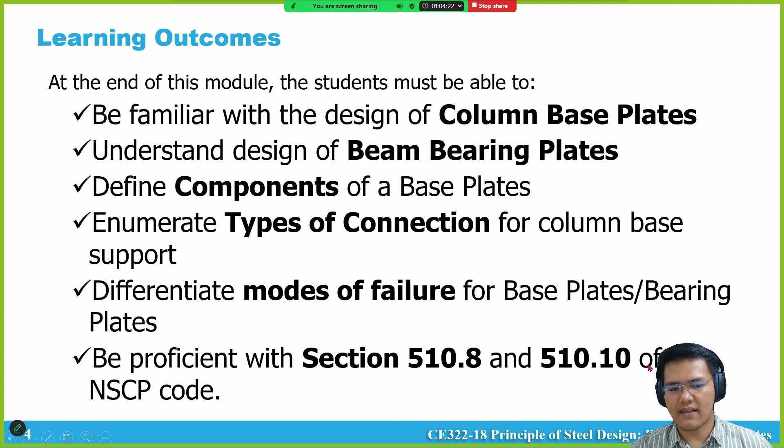So, okay, introduction muna tayo. This model of a certain structure was one of my previous projects, way back, I think 2022 or 2023, somewhere in Batangas, that uses base plate. So this is a portal frame structure.

Yung portal frame, to be specific, is usually applicable to single-story steel structures na ang requirement is merong large open floor plans. Walang column dun sa pinaka-center ng structure mo, as much as possible unobstructed yung floor spaces mo. Yun yung usual na requirement, and usually applicable yan sa mga industrial and commercial buildings, like mga warehouse. So ito yung project na to.

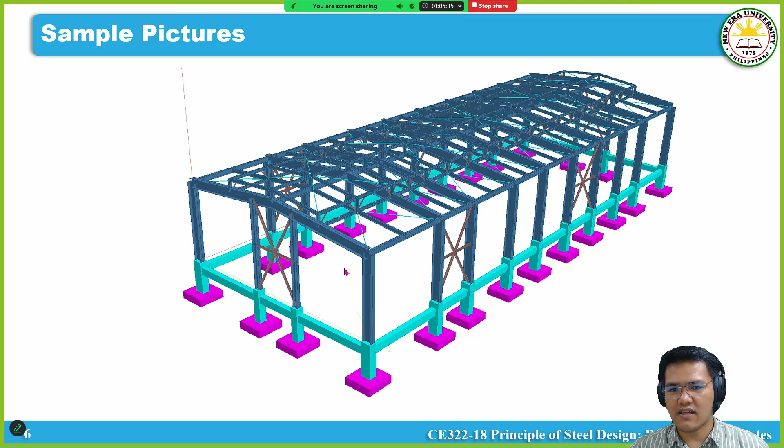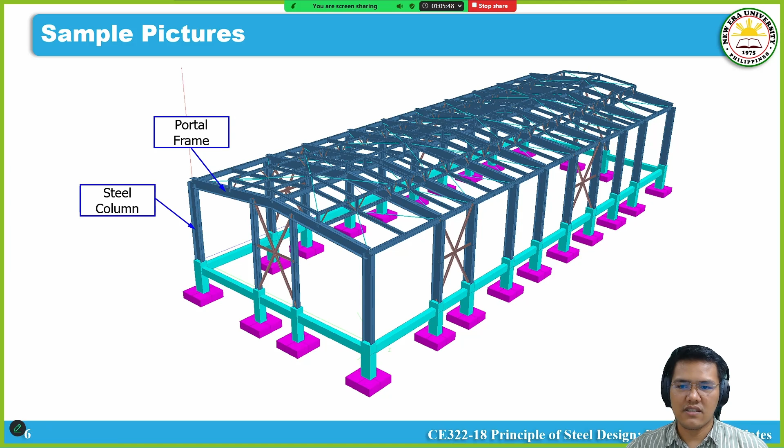So this is STAAD software yung ginamit ko. So we would enumerate yung mga structural members. Basically yan yung portal frame, yung system na ginamit natin dito. You have the steel column, and you have the concrete pedestal. Usually kasi hindi natin talaga binabaon yung ating steel column papaabutin natin hanggang footing, kasi una kakalawangin siya and hindi natin makita kung nakabaon yung steel member natin.

So ang nangyari ngayon, kung yung natural grade line or yung parang pinaka-finish ground level somewhere andito, makita mo yung pinaka-end or top nung concrete pedestal mo. Kaya nag-introduce tayo ng concrete pedestal para ma-investigate natin kung mayroong failure dun sa connection nung concrete and nung steel column. So ito yung concrete pedestal natin. Obviously concrete yan, you have the footing, and then we also have tie beam, yung ibang term dito is grade beam. At yung location na to, obviously yan yung location kung saan natin i-install yung ating base plate.

Minsan gumagamit din tayo ng cross bracing dun sa ating framing system to help against lateral displacement, specifically yung wind load, na most likely siya yung critical pag steel structure. So yun yung requirement natin as much as possible: expose yung ating base plate para nakikita natin for inspection purposes.

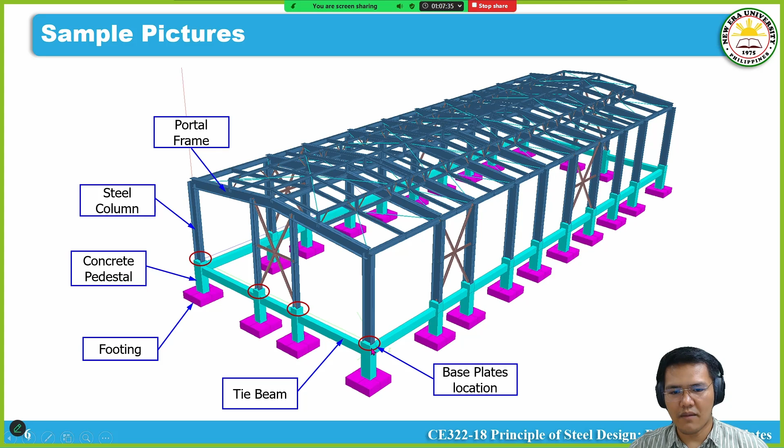Okay, now ito yung actual constructed project. By the way, ibang project to, pero same system lang din yung ginagamit at the same location ng project, or sabihin natin same different structure to. So you can see here na ito yung parang pinaka base plate natin, and we have the concrete pedestal. So how do you think this was constructed? Okay, yun yung discuss natin for today.

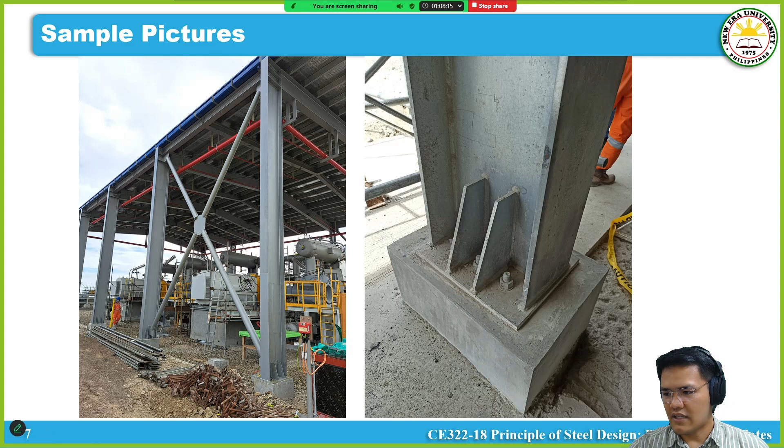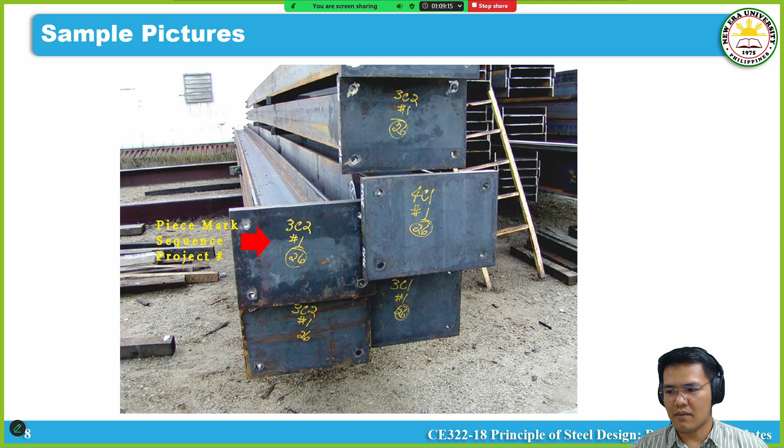Ang mangyayari kasi kung wala kang base plate, halimbawa steel column connected directly sa concrete pedestal, masyadong malaki yung mga loadings natin minsan sa steel column natin. Kung ganito yung section natin, wide flange, kumbaga masyadong matalim yung section natin, ang nangyayari is napapunch or nagka-crush yung concrete natin kung directly connected siya. So to avoid that scenario na mag-crush yung concrete natin, which is a mode of failure sa ating connection, we need to distribute evenly yung ating column loads, through the use of base plate. Yun yung gamit ng pinaka-base plate natin.

As I mentioned, usually shop welded na yung ating base plate sa bottom ng ating steel columns. Minsan, by the way, hindi lang siya connected sa concrete pedestal. May mga scenario na kung saan yung base plate natin is nakaconnect siya sa slab. Minsan nakaconnect sa beam, minsan nakaconnect sa pile caps, or minsan directly sa footing. So may mga ganong scenario.

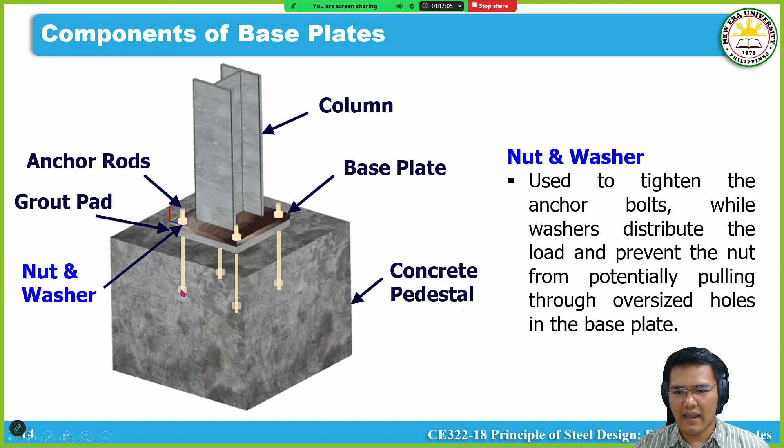Okay, now we're done with the components. So let's break down the individual parts - for example, let's discuss the anchor rod details.

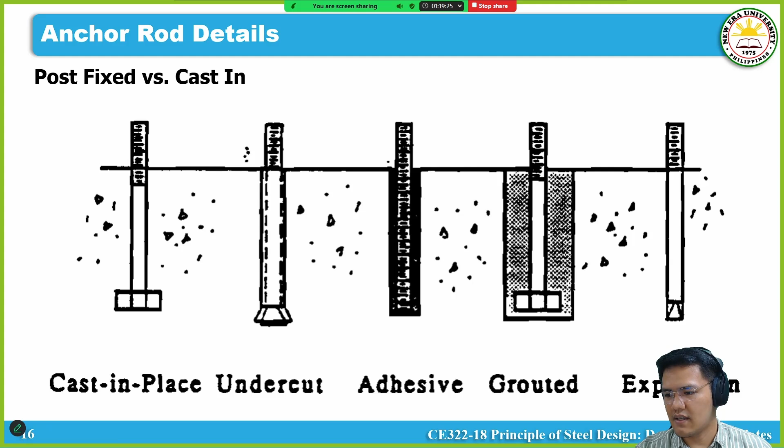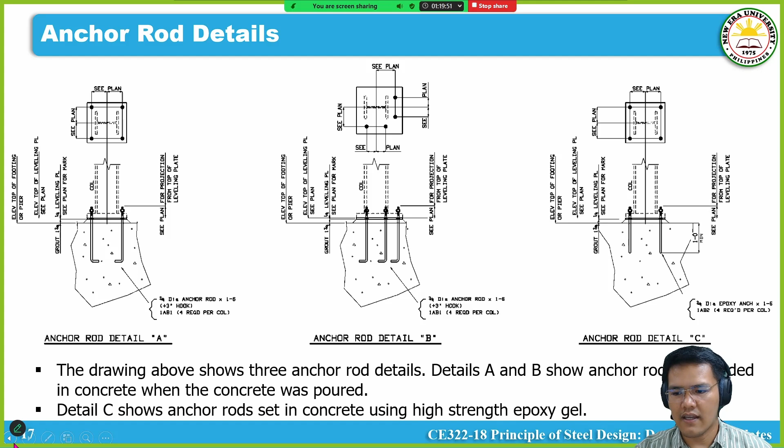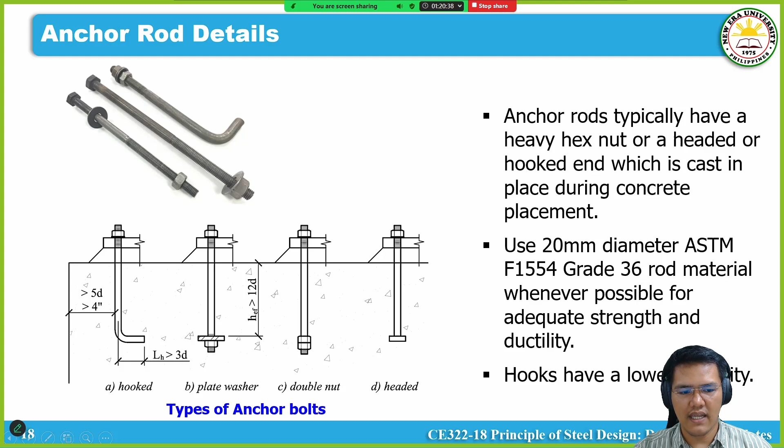During concrete placement, usually 20 millimeter diameter, grade 36 rod ang ginagamit. So again, yung hooks would have a lower capacity in comparison with this system.

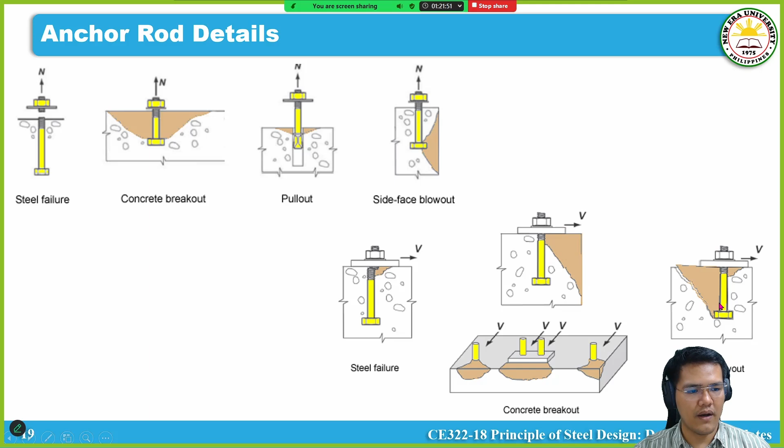And on this one, shear yung action mo. Meron kang steel failure, obviously shear failure to, kasi perpendicular yung load. We have a concrete breakout like so, ito yung mga example. And concrete pry out. So ibig sabihin ang dami talagang mode of failure for base plate design.

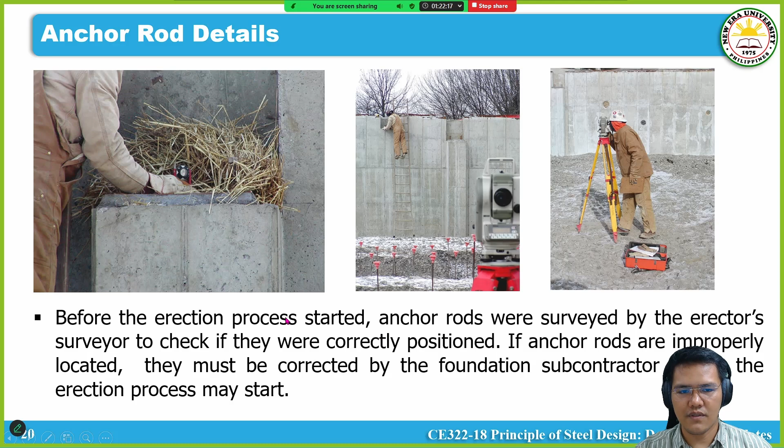Usually to make sure na accurate yung installation ng ating mga connections sa base plate, we usually have it surveyed to check na correct position tayo. Gumagamit tayo, depende sa contractor, ng total station.

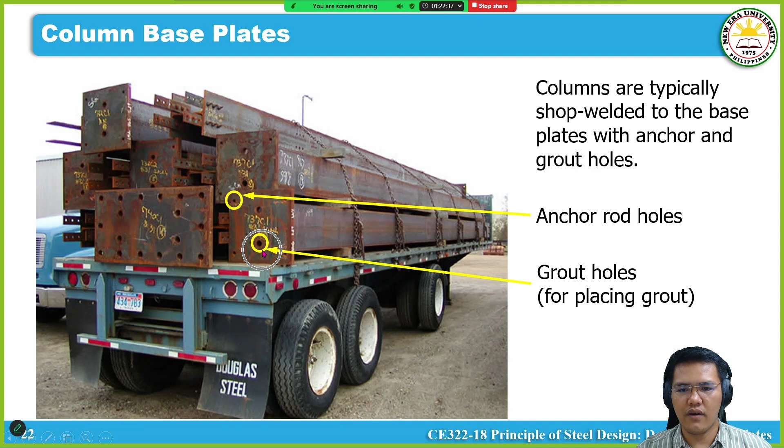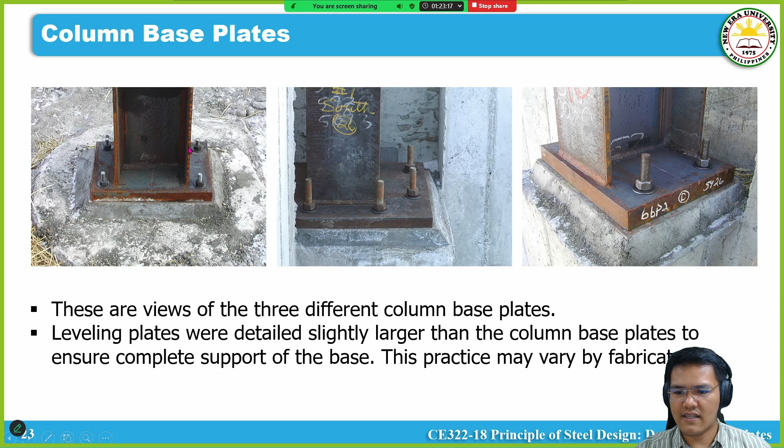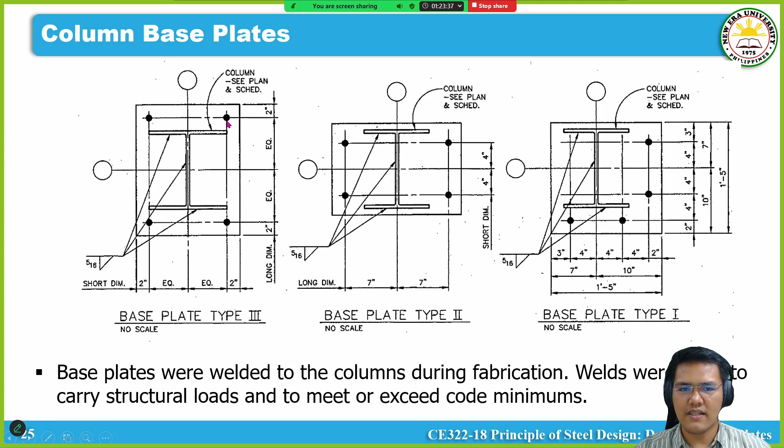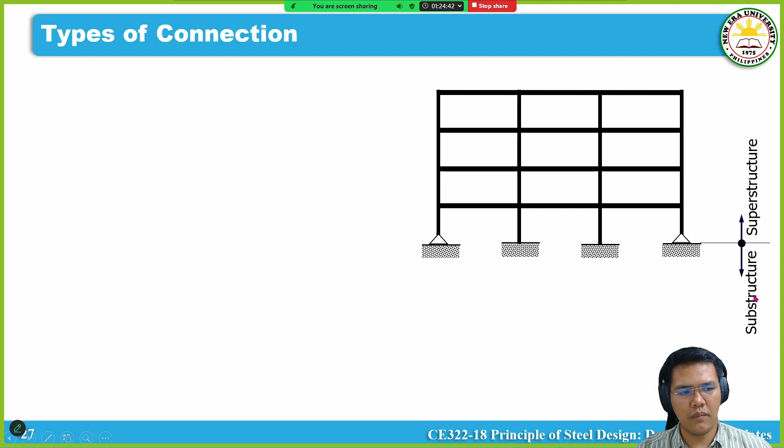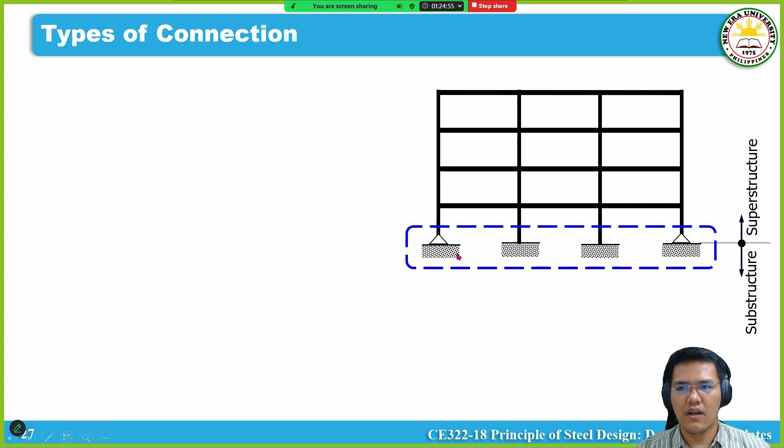Now, on this level, dun sa connection ng steel column and concrete pedestal, dun tayo nakafocus. Ang question kasi is, ano ka ba? Pin ka ba or fixed connection? Yan ang tanong. In terms of the column support fixity, dun sa base natin, pin ka ba or fixed?

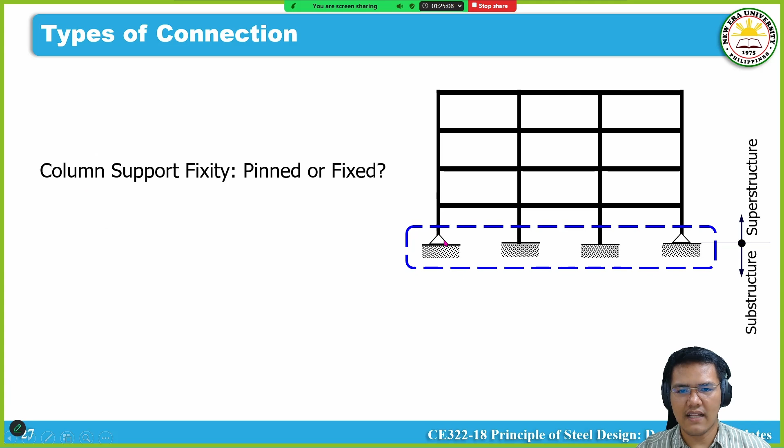So depende yan, para malaman kung ano yung gagamitin mo. Depende yan kung ano yung assumption ng designer. Ang sagot dito, number one is, ano ba yung assumption ng designer in terms of lateral stability? And ano yung fixity ng columns? And he or she kailangan niyang i-detail yan dun sa kanyang drawing appropriately.

Halimbawa, moment connection ba siya? Dapat yung detail nun sa drawing is for a moment connection. Otherwise, magkakaroon ka ng problem, dun sa idealized structure mo to the actual and constructed structure mo.

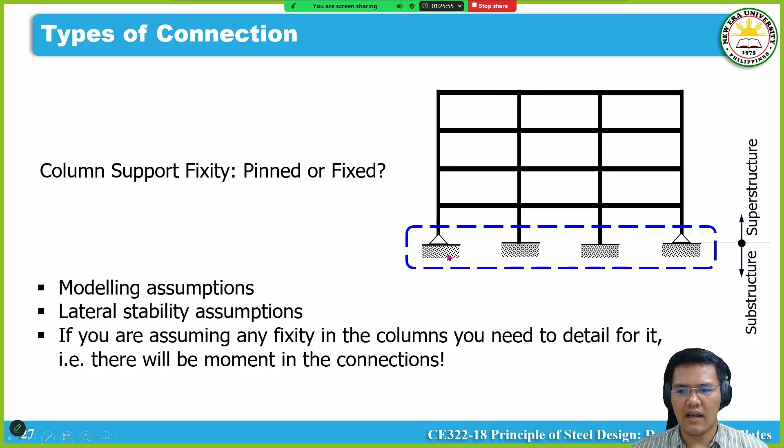Now again, in terms of the types of connection, dalawa yan. Sa base plate, yung pin connection na tinatawag, ito yung connection na kung saan it could transmit axial and shear forces only. So yung counterpart niya, ito. Ito yung elevation, meron kang axial compressive load, P, and shear, horizontal shear force, V. So pag tumingin ka sa top view niya, ito yung makita mo. Yan yung pin connection.

Makikita mo na yung sa connection na to, yung parang pinaka-angle, ayan. Yung angle mo, aside from the fact na possibly naka-weld ka, yung angle mo is connected sa web nung steel column. Ibig sabihin, kapag naglagay ka ng any force that would create any moment, it would allow rotation kasi nga pin connection ka. So ganito siya din detail.

Similarly, yung isang types is the fixed connection, which means it would transmit moments in addition to the axial and shear force. So ito na yung mga loadings natin ngayon. So you can see na iba yung detailing niya, yung connection niya dun sa base plate from the steel to the steel column is naka-connected yung flange mo.

Ng steel column. So yung effect niyan is it would hold down in place yung pinaka steel column mo to the base plate. Imimimic niya yung fixed connection. So in this one, there would be it would resist any rotational movement.

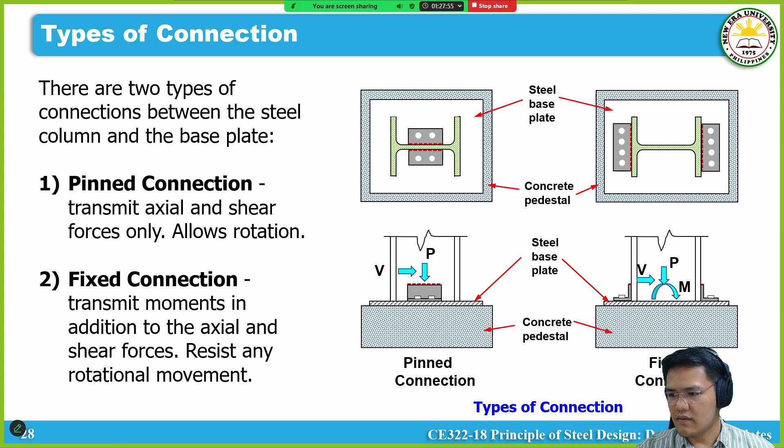Now, ang question is, kapag nasa practice na kayo or nagdi-design na kayo, ano yung appropriate types of connection na dapat mong gamitin? Fix ba or pin? Or pin ba or fix? So itong table na to would give you an idea kung ano ba dapat gamitin mo.

So for example, itong first row, we have the application. So for pin connection daw, usually ginagamit yan kapag yung deflection requirements mo are very stringent and the structure needs to be more flexible. Kasi nga, pinned mo eh, so flexible yung structure mo.

Similarly, kung fix ka, usually ginagamit daw to kapag yung column mo needs to be rigidly connected to the foundation. And therefore, it would resist any bending moments, and it would provide stability.

In terms of example, ng ating pin connection, a simple building or sabihin natin one-story building frame with columns connected to a foundation can have a pinned base at the bottom, allowing for some movement and flexibility.

Similarly, yung fixed naman, for an example nito, so in structures where the columns are subjected to large bending moments, ang halimbawa nito, yung tall building or high-rise, fixed connection at the base are often used to provide greater resistance to these large bending moments. Yun yung usual na in practice.

Similarly, yung epekto nito or implication nito, kapag pinned connection yung ginamit mo, it would result into larger steel section sizes for the superstructure, yung columns mo specifically. Bakit? Kasi nga yung moment mo binubuhat nung mga columns mo, hindi nung base plate mo.

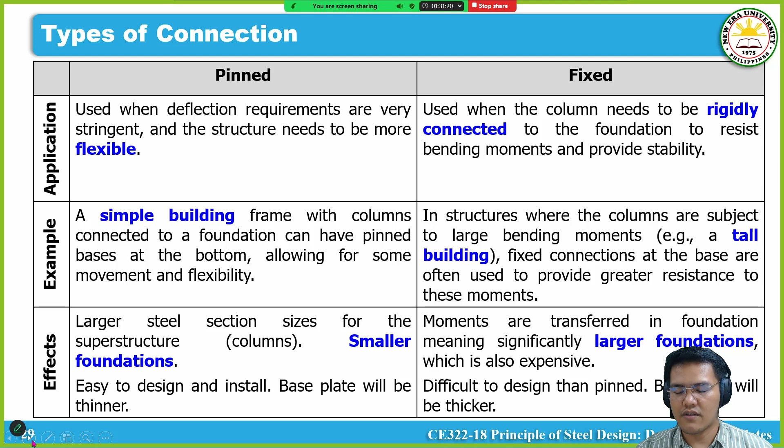Let me emphasize lang na on this discussion, we would focus only on pin connection. So hindi tayo magdi-discuss ng any fixed connection as it would be matrabaho, at sa board exam naman usually hindi lumalabas si fixed connection.

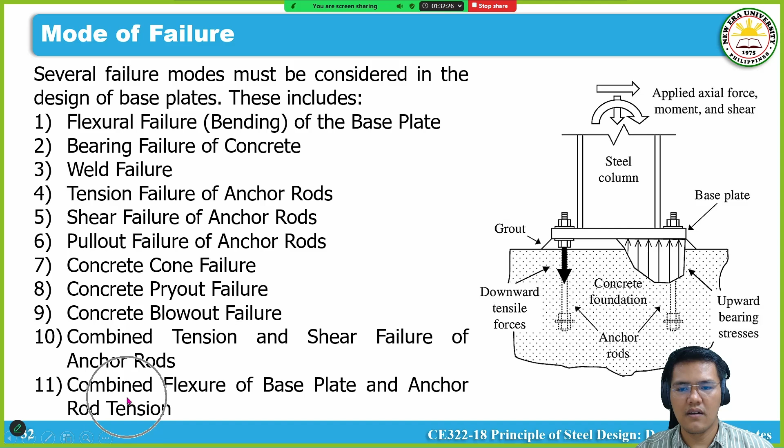For a given base plate, to simplify our discussion, we will limit that.

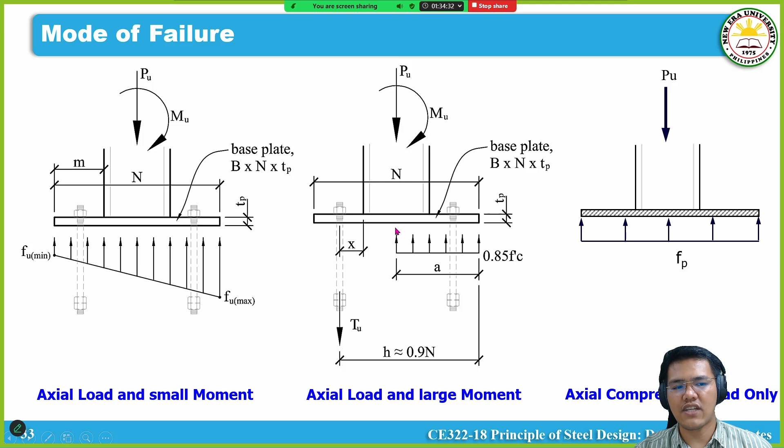So that's the scenario or stress distribution when it comes to different types of loading. In terms of analysis, it's case to case. Now let me emphasize again, in our discussion we would focus only on this scenario: axial compressive load only.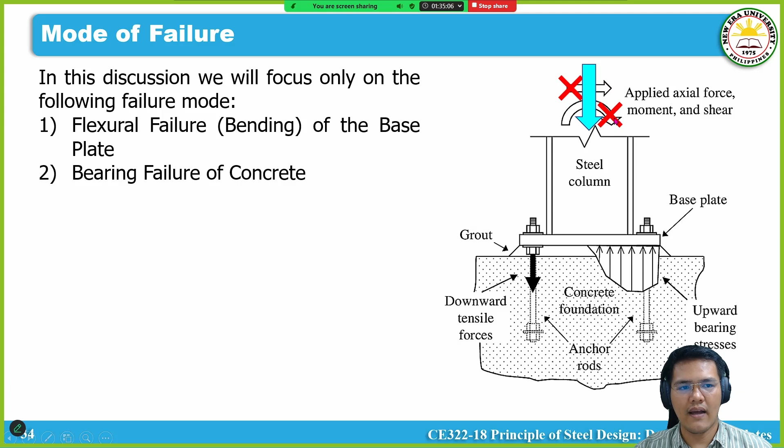In terms of mode of failure, let's simplify our discussion. We would focus only on these two modes of failure: the flexural failure or bending of the base plate, and the bearing failure of the concrete. Again, let me emphasize, axial compressive force only, no shear and no moment. Pin connection, axial compression load only.

Now let's proceed to bearing on concrete. These are the formulas we need to discuss first in terms of how they were derived. In terms of code provisions, NSCP 2015 discusses this in section 510.8. It says here, on bearing on concrete, this is what we call the nominal bearing strength. Emphasize on the word used, strength, meaning the units are in kilonewtons.

Bearing means you get crushing on the concrete, that's its effect. Your nominal bearing strength, in case 1, full area of concrete support - we'll discuss what that means later - your formula is F sub P, P sub P is equal to 0.85 F prime C, or FC prime, times A sub 1. By the way, all the formulas we'll use in the design of base plate come from here.

All the formulas come from the classic formula, stress equals load P divided by area. We just rearrange it. For example, this formula here is in terms of load, so you could say P is equal to stress times area.

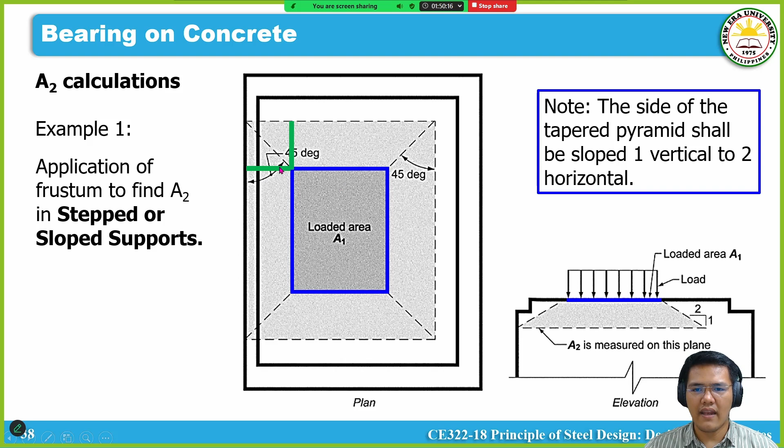Kung baga, sa case na to, yung side na to yung unang na-reach, tapos yung distribution. Kasi hanggang dun lang, halimbawa, sa side na to. Ito yung counterpart niya. Hanggang dun lang yung distribution. So yun na yung basis ng ating calculation. Yung pinaka-area talaga ng basis ng area 2.

Is ito, itong hidden maroon colored line na to. So ito yung sa plan, ito naman yung sa elevation. Just to take note lang, yung slope ng distribution natin as per code, that is 2:1. 2 yung ating horizontal, 1 yung ating vertical. Yan yung distribution ng ating for the area 2 calculations.

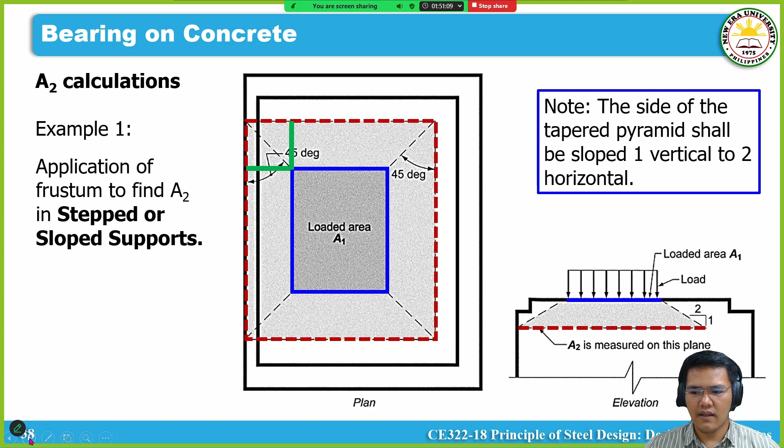Now, in terms of example number 2, ito naman for concrete footing. Yung steel column natin o yung base plate natin, naka-connected directly sa footing mo. Sa case na to, as per the code, kung gusto mong i-calculate yung area 2, halimbawa ito yung area ng ating base plate, area 1. Kung i-distribute mo daw yan, that is 2:1 na rule ng slope. Kukunin mo lang daw yan dun sa effective depth nung reinforcement mo. Yan ang rule ni code.

For concrete footing, yung definition kasi ng effective depth, hindi ako sigurado kung ano yung nomenclature na ginagamit nyo sa RCD. But on this one, D sub F, ang definition yan is from the concrete cover to the centroid of your reinforcement. Yan yung effective depth. Kunin mo lang daw doon sa distance na yon, yan yung location kung saan doon mo i-base yung pinaka area 2 calculations. Okay, I think enough of that.

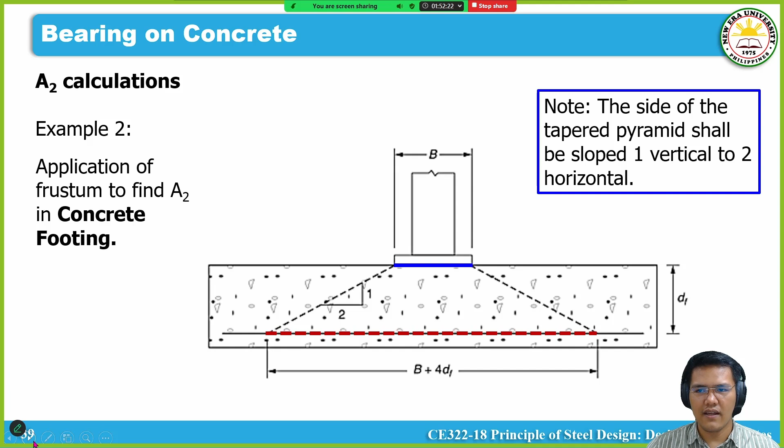Let's proceed pa dun sa bearing on concrete. Yung mga assumption natin, say for example, you have your steel column and meron kang base plate. Yung assumption natin is axial load, compression, load P. Common sense yan, kung i-consider mo yung free body diagram, kung meron kang downward na load P, it would be resisted by your concrete. And meron kang usually uniform upward pressure to resist yung downward load P mo.

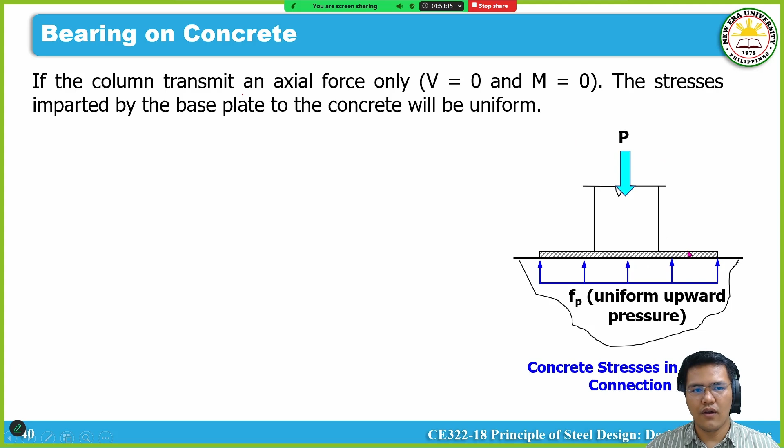So ibig sabihin yung pressure dito sa pinaka base plate natin, sabihin natin small letter F sub P, uniform upward pressure to resist yung load P natin. So let me repeat, yung assumption natin shear is 0, moment is 0, and therefore yung ating pressure here is uniform.

Now, the actual uniform concrete stress na tinatawag, pag sinabing actual, ito yung based sa actual loads na ina-apply mo, would be based dun sa equation na small letter F sub P. Ito yon, yung stress dun sa ating bottom of our base plate is equal to the load P applied divided by yung area ng base plate, area 1. Common sense yon, by the formula na stress is equal to load P divide area.

Gusto ko i-emphasize itong actual, ang symbol na ginamit niya is small letter F. So sabihin natin equation 3 to.

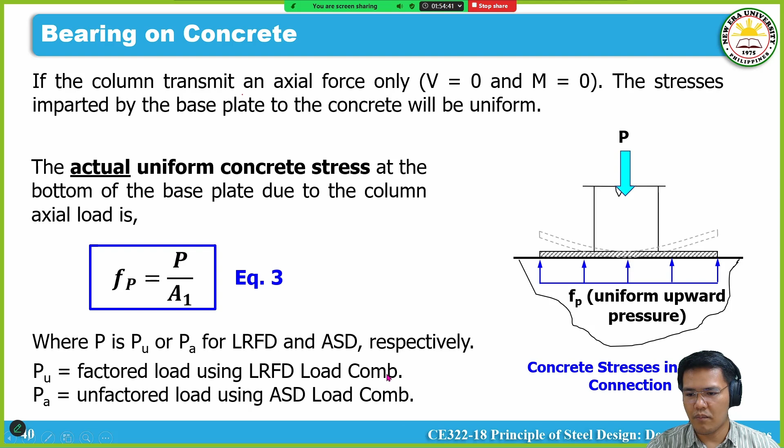So, to take note lang, to calculate yung load P, pwedeng maging load PU yan o load PA, depende kung LRFD or ASD na design philosophy. Yung P sub U, na-calculate yan based sa factored load using LRFD load combination. P sub A, unfactored load using ASD load combination.

Now, in terms of the limiting or permissible concrete bearing strength, kung dun sa previous slide, we're dealing with the actual concrete stress, which is basically dependent dun sa actual load P na in-apply mo dun sa base plate mo, meron tayong kailangang i-compare sa kanya, yung tinatawag nating limiting or permissible concrete bearing stress. Ito lang kasi yung limit, at yung magdi-dictate diyan, well, yung limit ng concrete, yung bearing stress dun sa concrete natin.

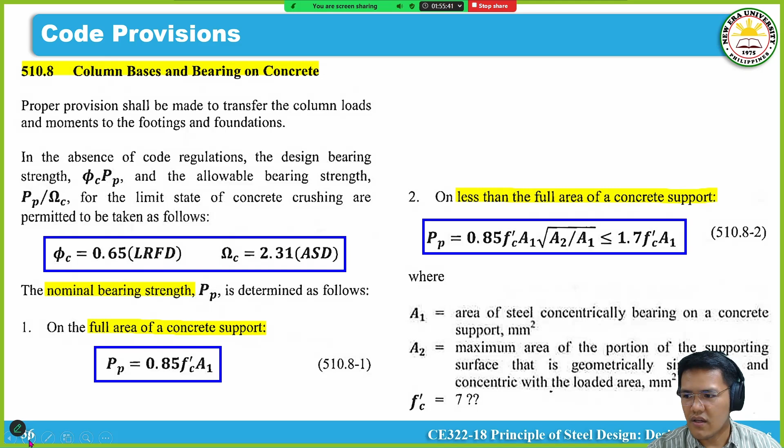Now, kung babalik kasi tayo, let me go back dun sa ating equation dun sa pinakasimula. Dito nung pinakita natin yung ating equation, if we would go back, yung ating formula is simply stress is equal to P over area. Halimbawa, gusto kong kunin yung load P.

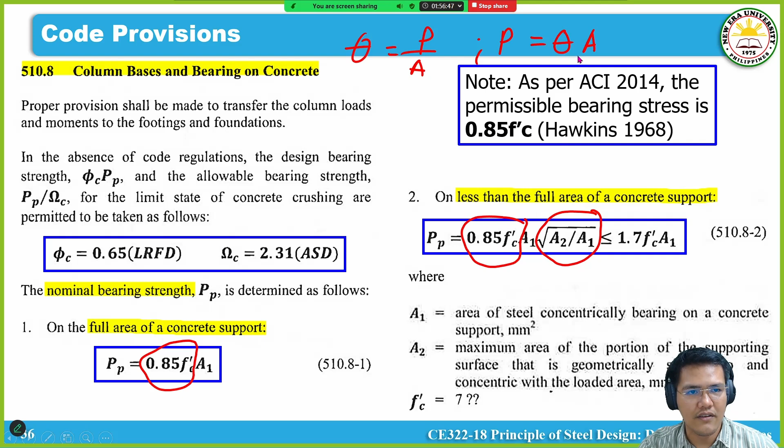So, basically I would have load P is equal to stress times area. Now, if we would compare kasi yung stress, di ba sabi natin on case 1 ito talaga yung stress, permissible stress as per Hawkins, 0.85 FC prime, di ba? What if for case 2, ano ba yung equivalent nung stress sa formula natin? Well, ito yon, actually ito yon. Itong 0.85 FC prime for case 2 and yung factor na to, ito yung value na yan. Yan yung equivalent ng permissible stress for case 2. Ibig sabihin itong equation na yan, yan yung ano talaga, yung stress natin on this equation, and yung area 1. Now, if we would go back dun sa slide na yon, balik tayo dun sa slide na to.

We could say from equation 2, the stress. Again, this is the limiting stress. But now, the letter we used is capital letter F. For our base plate, it would be 0.85 F C prime square root of A sub 2 over A sub 1, which I explained earlier how it was derived. So this is also compared with 1.7 F C prime. Let's call this equation number 4.

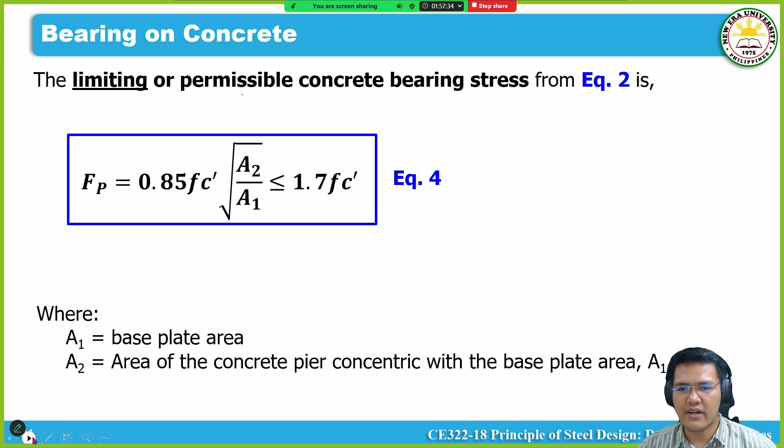So these are the given values, and how they are calculated. Another equation. Now, in terms of the base plate.

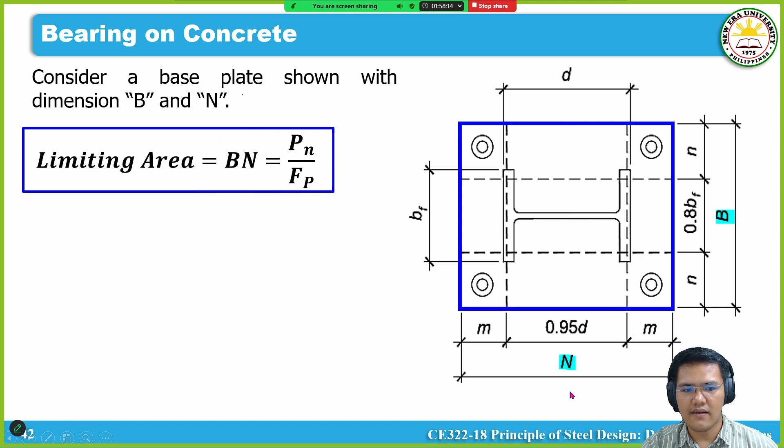I want to emphasize the dimensions of this base plate. For example, this is our figure for the base plate, and this is the area of our base plate. The area would be dependent on dimension B and dimension N, distance B and distance N. Considering those dimensions, we could say the limiting area is also equal to the area of the base plate, which is the side or dimension B times N. So if we go back to the stress formula, it's equal to P over A.

So area is equal to, if we substitute the location of the stress, you can see here this is area. The numerator is load P sub N, and the denominator is stress. So the equivalent of that from the previous slide is capital letter F sub P. This is our stress, but what we used here as the base is the limiting stress, because this is as much as the concrete can resist in terms of bearing strength.

Let's call this equation number 5. Now if we proceed with our discussion, let's rearrange that equation in terms of stress. We would have this equation. Let's rearrange it. We would have capital letter F sub P is equal to the nominal load P divided by the area, which is B times N. Let's call this equation 6.

Now to calculate P sub N, we have formulas used for this. We can use the one for ASD. So where does this come from? It comes from P sub A is equal to P sub N divided by omega. Now this equation for P sub N in terms of LRFD comes from P sub U is equal to phi times P sub N. So just rearrange it, and that's the equation.

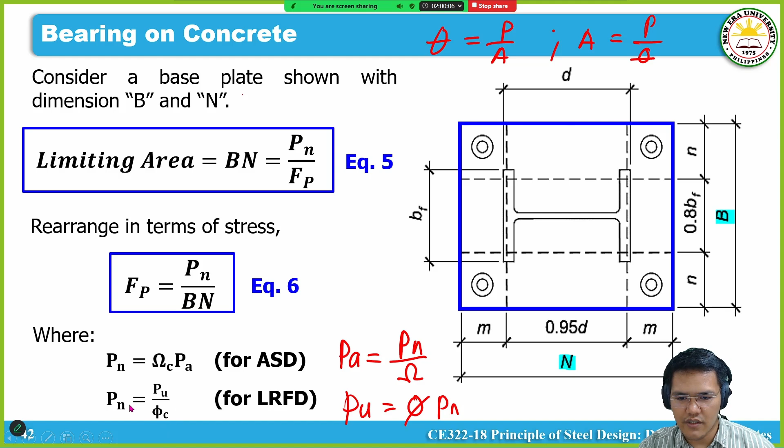Now we're done with bearing on concrete. Basically, our end result is we already have the formula on how to calculate the area. The next step is to discuss bending on the base plate, this mode of failure. So what does the code say about this?

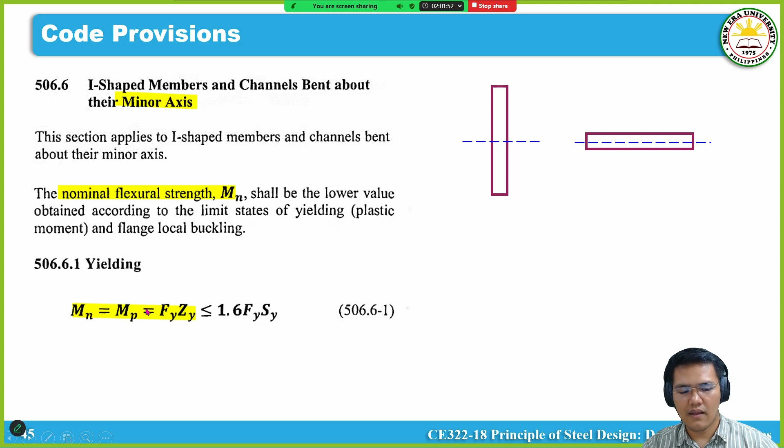So we now have our first basis for the design of our base plate. Now to calculate the plastic section modulus of our solid rectangle, I haven't discussed yet how to calculate the plastic section modulus. But to give you an idea, the definition of plastic section modulus is a geometric property of a given cross section, usually used to resist the bending applied to the section. But the assumption is the section is in a plastic state, or fully yielded, which is why it falls under plastic analysis. The counterpart of this is S, or the elastic section modulus.

So ang counterpart nun is elastic analysis. Now, paano ba siya kina-calculate, yung plastic section modulus. Meron tayong separate chapter dito to discuss yan, para hindi na tayo humaba.

But to give you an idea, ang ginagawa dito is kung ano yung given section mo, i-divide mo lang siya equally into two, yung area mo. I-divide mo yung area ng cross section mo equally into two. Sa case na to, since rectangular ka section, yung equal area mo nagko-coincide with the neutral axis.

Okay? Equal area na division nasa neutral axis. At ang sabi ng mga textbook, to calculate yung plastic section modulus, kunin mo lang yung moment summation ng moment of area from the neutral axis or from the PNA or the plastic neutral axis.

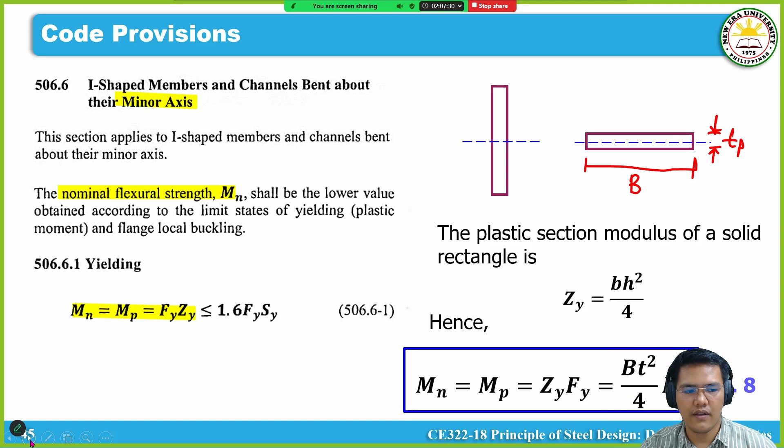Okay, so ito na yung ating equation 8. So gagamitin natin 'to mamaya. Now, in terms of the code, kanina ko pa pinapakita tong figure na 'to kasi ito rin yung magiging basis nyo ng calculation ng mga parameters natin.

At ang sabi ni code, yung dimension na to ay naka-base doon sa dimension ng wide flange mo, which is yung distance D, at distance B sub F. So halimbawa, if this is distance B sub F, ang sabi ni code, yun daw critical area on this side, which ay 80% lang nung B sub F. Yung talagang critical area na mag-resist ng mga loads mo sa base plate, 0.8 B sub F.

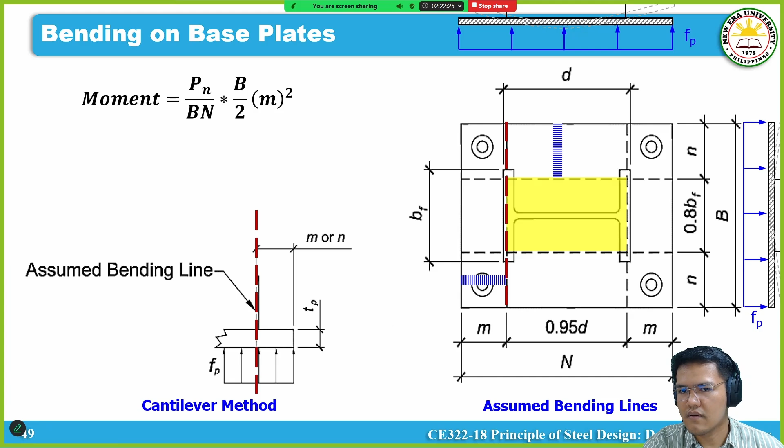Okay, ito na. From this equation, pinag-in natin yung value ng small letter f sub p, which is p sub n over B N. So the rest of the equation, ito yon.

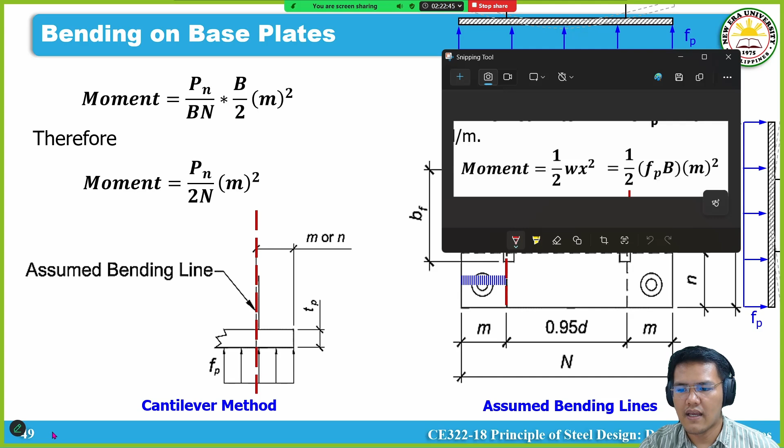Ngayon meron kang ma-cancel out. Specifically, yung ma-cancel out dito is yung side b. So magiging equation mo ngayon for the moment is p sub n over 2N times m squared. Yun yung moment mo doon sa bending lines na to.

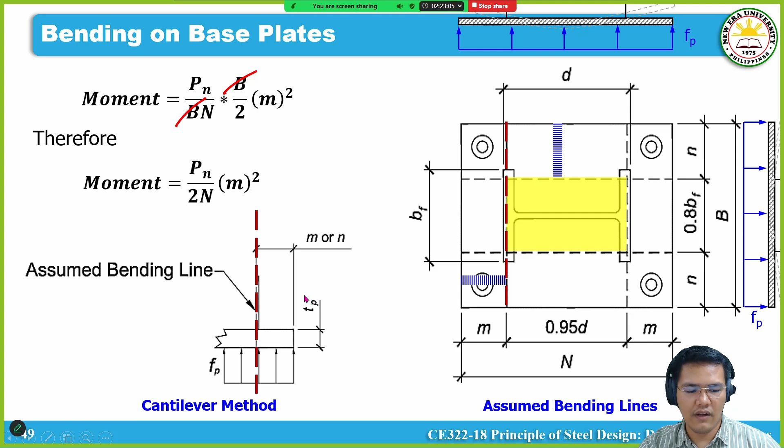Now, meron na tayong dalawang equation ng moment. Sabihin natin equation 9 pala to. We could now equate yung equation 8 and equation 9 to calculate our nominal flexural strength.

So, you would have this equation times this equation from initial derivation natin. And if we would rearrange this in terms of the parameter t, we would have the required t is equal to the distance m times the square root of 4 over b times f sub y times p sub n over 2N. So ito yung parang formula natin.

Now, we could simplify this further. Ang magiging equation natin, di ba sabi natin, area 1 is equal to b times n, yung area ng base plate. And this one would cancel out, magiging 2.

So that would result to the thickness required for side m, which is t sub m, is equal to length m, square root of 2 times the nominal load P divided by area 1 times F sub y. Ito na yung pinaka-final formula natin na dapat niyo talagang tandaan.

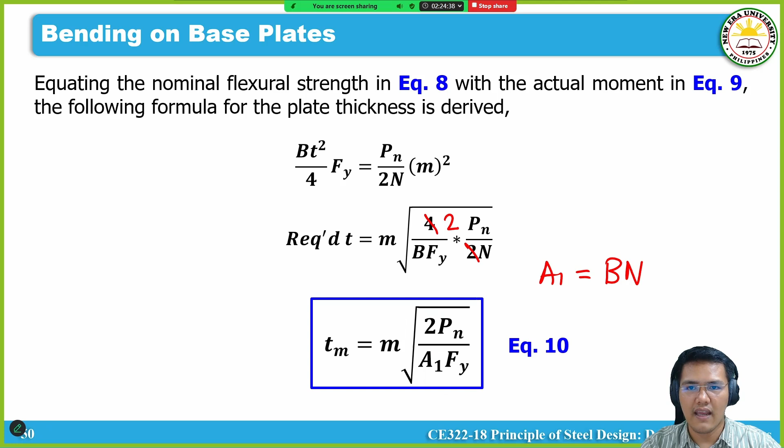Hindi na natin i-derive on our calculations. Ito yung gagamitin natin. Sabihin natin equation 10. Ngayon, gusto ko lang i-emphasize, yung derivation na to, naka-base to dun sa derivation natin.

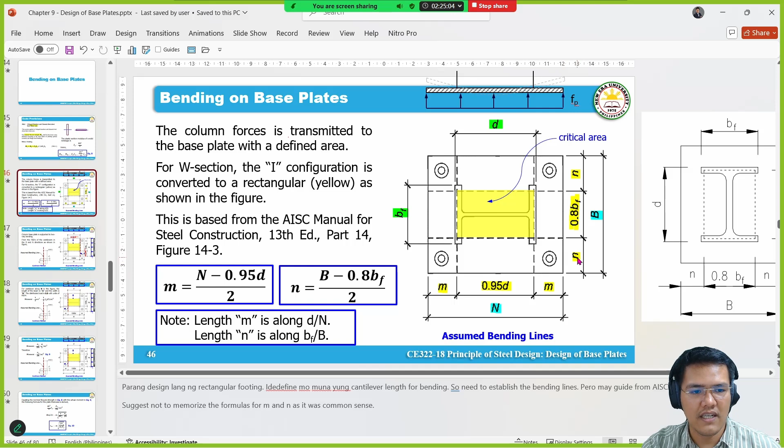Kung saan yung ating kinonsider na area is ito. What if yung area naman ay consider natin on another derivation is itong area na to. Ibig sabihin yung side n or yung thickness n yung ma-generate natin. So, gamitin mo lang or sundin mo lang yung same way on the derivation. Ang makakalculate mo na thickness is somehow similar to t sub m.

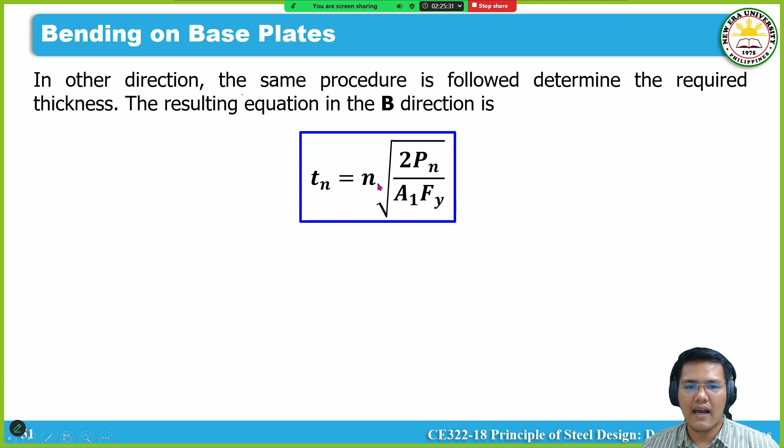So, ito na yun. If you would focus on the b direction, you would have t sub n is equal to n square root of 2 p sub n over a sub 1 f sub y. So, parang parehas na parehas lang. Ang nagbago lang yung parameter dito sa labas ng square root. Parehas na parehas lang.

Equation 11. Just to take note lang, yung p sub n dito sa equation natin could be calculated as equal to p sub u over phi sub b for LRFD or p sub a times omega sub b for ASD. And similarly, gusto ko i-emphasize kasi bending tayo.

Hindi na tayo bearing on concrete. So, ibig sabihin yung mga understrength natin magbabago na. Kapag bending on plates or anything about bending, ang understrength natin is 0.9 for LRFD, yung phi. At yung omega natin is 1.67 for ASD. Take note lang for concrete bearing strength, it's 0.65 kung di ako nagkakamali and 2.31. So magkaiba yung gagamitin nating understrength kasi magkaiba yung mode of failure.

Okay, so ngayon, meron tayong mga na-derive na formula. We could now use that actually to solve any problem. Emphasis lang, kasi sabi natin, dalawa yung thickness, formula ng thickness, T sub m or T sub n.

So, usually, ang nag-govern doon kung sino yung mas mataas. So, yun na lang yung gagamitin natin. Actually, hindi mo na siya kailangan i-calculate. Mag-refer ka na lang doon sa value ng m and n. Kung sino yung mas malaki doon, siya yung mag-govern na thickness. So, bakit siya yung mag-govern?

Kasi baliktad, di ba? Kapag area or size ang usapan, pag meron kang iba't ibang values, yung maximum value yung mag-govern. Pero kapag load ang usapan and meron kang iba't ibang values, yung minimum value yung kukunin mo. So parang ganun yung logic. Dito, let me repeat, yung maximum value in terms of m and n, yun yung gagamitin natin on our design or on our calculations.

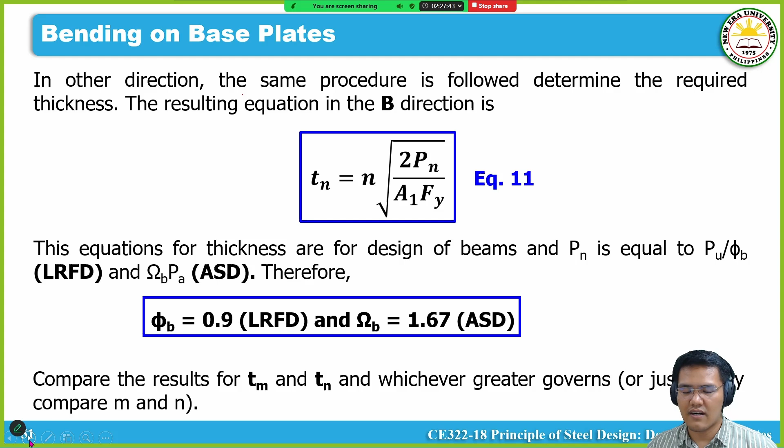Sige. I think that would be the end of the introduction. Let's proceed on example problem.